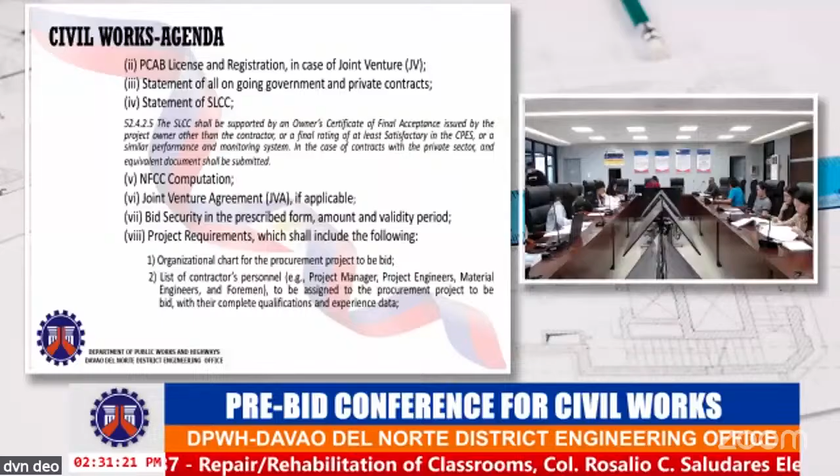Then list of contractor's personnel, list of contractor's major equipment units which are owned, leased, or under purchase agreements. Then omnibus sworn statement in accordance with section 54.3 of RA 12009. Then sworn affidavit of eligibility and beneficial ownership based on memorandum dated November 19, 2025.

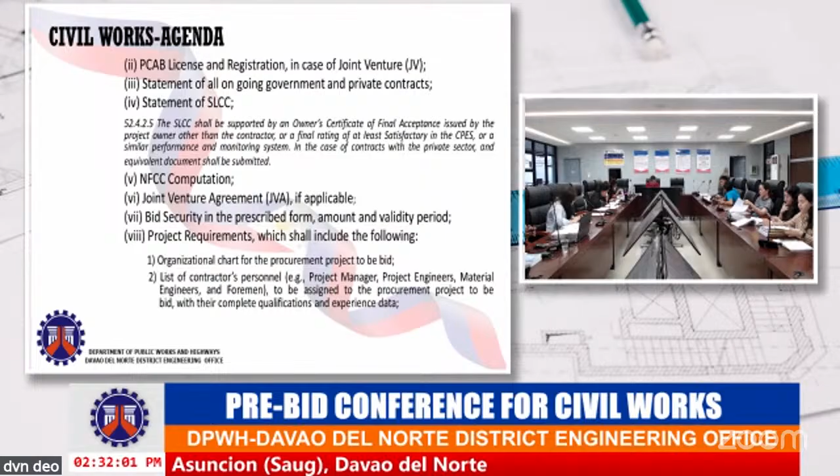And next is the financial proposal, the bid form, the bid prices in accordance with Instruction to Bidders clause 13.1.

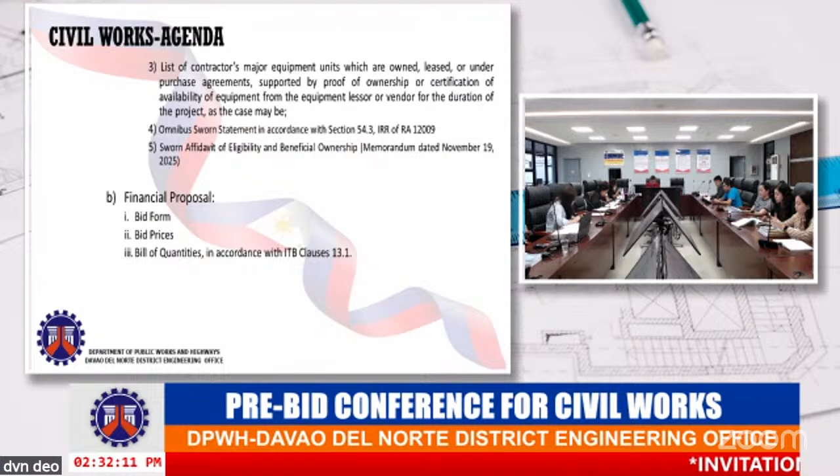Next is the criteria and procedure for eligibility check, preliminary examination of bids, detailed evaluation of bids, post-qualification, deliberation, recommending award, and award. And also, questions and comments from bidders, and replies of BAC and other representatives of the procuring entity.

Now, on other matters, be guided by the interim guidelines upon lifting of suspension on procurement activities for locally funded civil works projects, in reference to the department memorandum dated September 16, 2025, issued by Secretary Vivencio D. Dizon.

Applicable on this pre-bid conference, first, the live streaming. Also, the geotagging of project sites is applicable. For the implementing unit, the preparation of the straight line diagram is mandatory for inclusion as an attachment to the bidding documents.

Also, the NFCC and disclosure of relations beneficial to ownership, and some department orders for the guidance of the participating bidders.

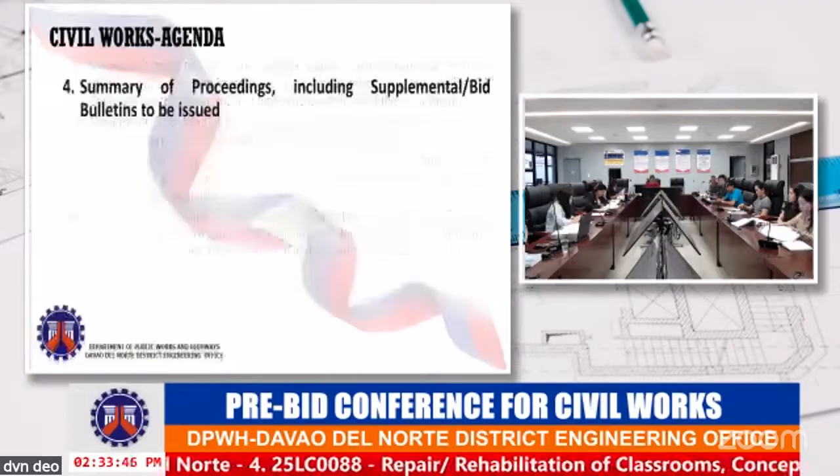Okay, so let's now proceed with the brief presentation of the basic contract data. Engineers from the Planning and Design Section is recognized. Go ahead.

Good afternoon, Mr. Chair, good afternoon everybody. The contract ID number is 25LC0084, the contract name is Construction of School Health Facilities, La Filipina Elementary School, City of Tagum, Davao del Norte. Brief description of the project is construction of school health facilities. The approved budget for the contract is 5,472,000, the source of fund is FY2025 GAA BEFF, and the contract duration is 120 calendar days.

Any changes, ma'am, from the previous pre-proc? None for the quantity, only the description, wherein we have to apply 3,000 PSI for the item number. Please go back to the first slide. On that data, ma'am, is there any change based on what we will adapt? None, Chair. Okay, so proceed.

So again, the contract name is Construction of School Health Facilities, La Filipina Elementary School, City of Tagum, Davao del Norte. The project ID is 25LC0084. The ABC amount is 5,472,000, and the contract duration is 120 calendar days, and the source of fund is FY2025 GAA BEFF.

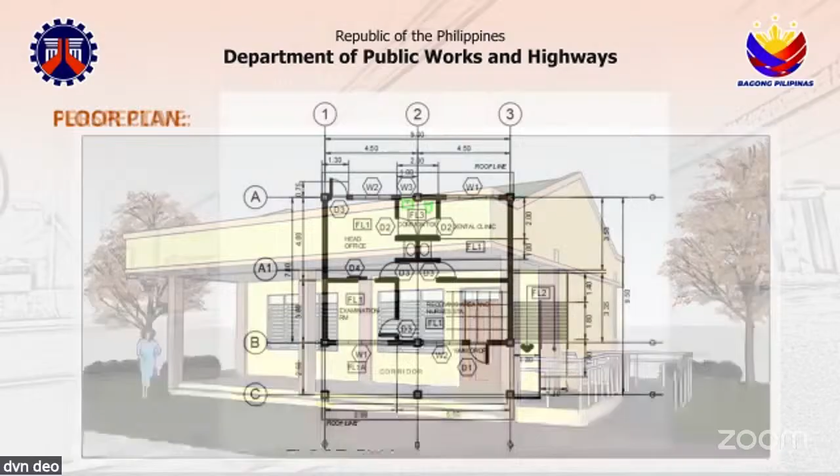This is the perspective of the project. The floor plan of the project, wherein there is a corridor, receiving area, examination room, head office, common toilet, and dental clinic.

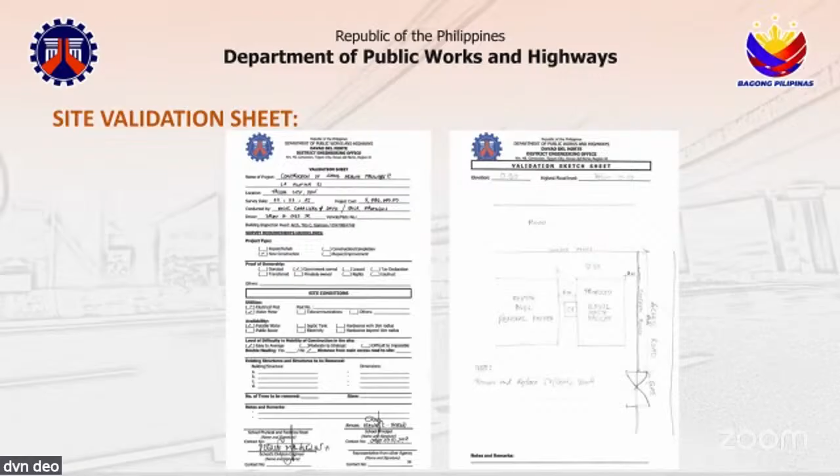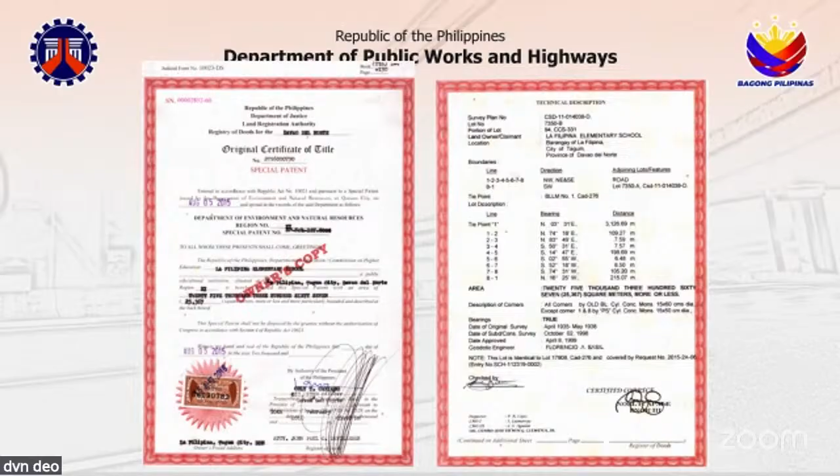The site validation sheet, and then the title - that's the original certificate of title. And that's all, thank you.

Good afternoon everyone. Good afternoon, Mr. Chair. For the bill of quantities, Ma'am Joanna, as posted po, pay item number 1051-8, railings. And sa presentation, pwede pa? Okay, sige. As presented po, 1051-1A, railings.

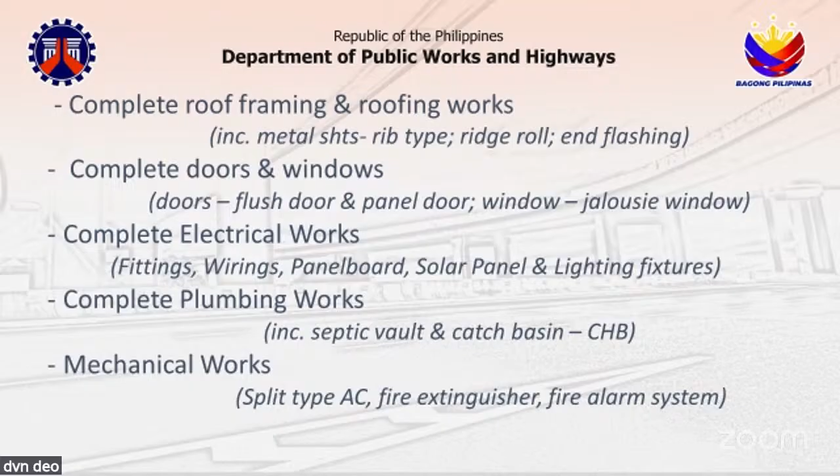The scope of works is removal of structure and obstruction for existing 11 by 11 old Packer building, structure excavation for footing, tie beam, ramp, steps, septic vault and catch basin, embankment from structure excavation, gravel fill for footing, tie beam, ramp, steps, septic vault and catch basin. Next slide please. Complete concrete works, complete masonry works, complete tiling works, complete cement plaster finish, complete ceiling works, complete tiling work, painting works. Complete roof framing and roofing works, complete doors and windows, complete electrical works, complete plumbing works, and mechanical works.

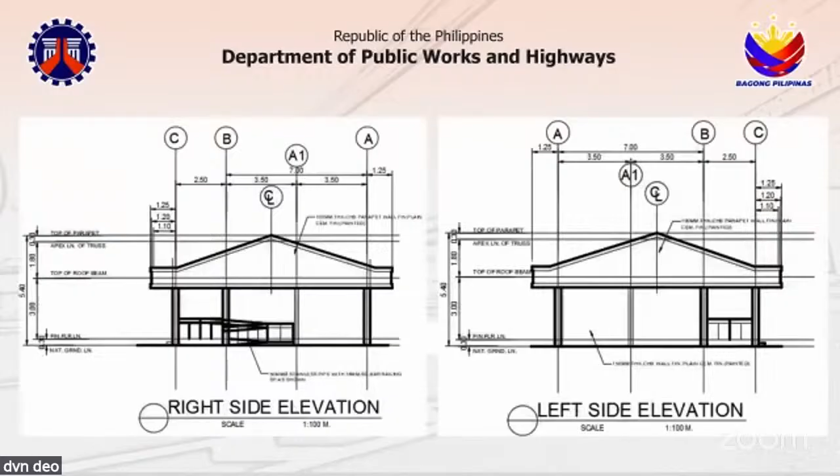Then we have the item number, description, quantity, and unit of the project. For Part A and Part B, other general requirements: permit and clearances, 1 lump sum; project billboard and signboard, 2 each; occupational safety and health, 1 lump sum; mobilization, demobilization, 1 lump sum. For Part C, earthwork: removal of structure and obstruction, 1 lump sum, this is for the removal of Packer building; structure excavation common soil, 75 cubic meter; embankment from roadway structure excavation, 60 cubic meter; gravel fill, 19 cubic meter.

For Part D, reinforced concrete: structural concrete, class B, 28 days, 3,000 PSI, 14.78 cubic meter; structural concrete, class A, 28 days, 4,000 PSI, 29.39 cubic meter; reinforcing steel deform grade 40, 2,779.06 kilogram; reinforcing steel deform grade 60, 4,857.35 kilogram; formworks and false works, 384.48 square meter.

For Part E, finishing, sanitary, and other civil works: soil poisoning, 4 liters; CHB non-load bearing including reinforcing steel, 100mm, 144.75 square meter; CHB non-load bearing including reinforcing steel, 150mm, 131.10 square meter; 6mm ordinary plywood in wood framing ceiling, 108 square meter; glazed tiles and trims, 10.66 square meters; unglazed tiles, 108 square meters; cement plaster finish, 765.30 square meters; reflective insulation, 85.50 square meters; railings, 1 lump sum; painting works for masonry and concrete, 819.9 square meters; for wood, 26.70 square meters.

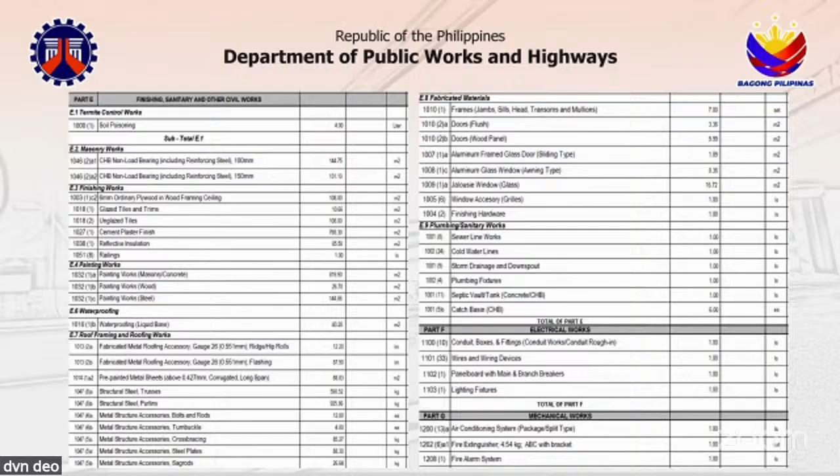And for Part G, the mechanical works, we have air conditioning system, fire extinguisher, fire alarm system, are also in 1 lump sum. The geotag photo of the project.

Then the sub-allotment advice. The site validation sheet. And the proof of ownership.

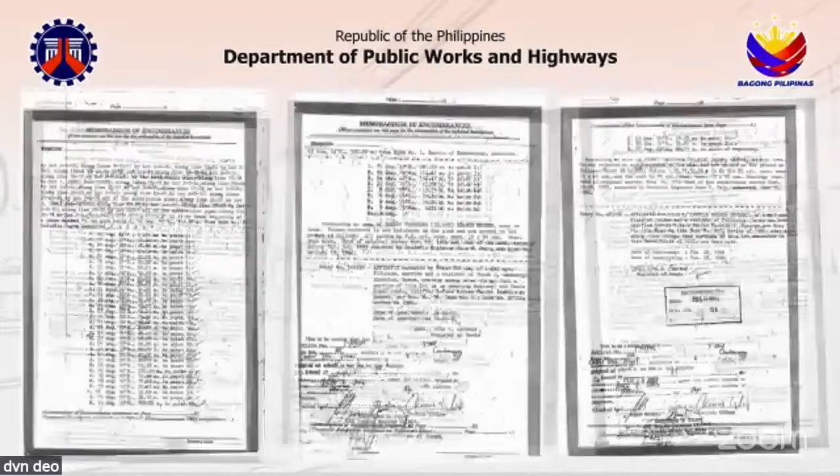Thank you. Implementing office, kindly state the range of PCAB license and the majority of works, or the major category of works. Who identifies the major category of works? Is it the implementing office?

Implementing office, Mr. Chair, but please coordinate with planning. Okay, kindly state. For the 25LC084 and 25LC085, the major category of works,

Hearing none, proceed to the next.

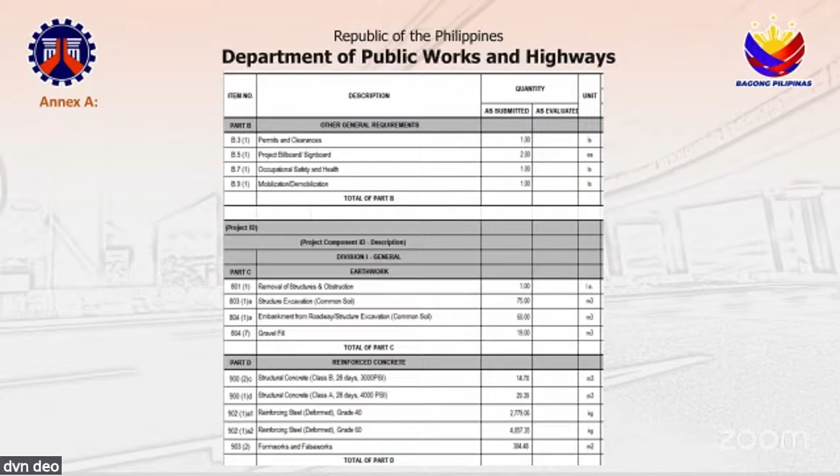Next, contract ID. Proceed. The next contract ID number is 25LC0087. This is the repair rehabilitation of classroom, Rosalio C. Saludares Elementary School, City of Tagum, Davao del Norte.

This is the repair rehabilitation of classrooms. The approved budget for the contract is 10,450,000. The source of fund is FY 2025 GAA BEFF, and the contract duration is 180 calendar days.

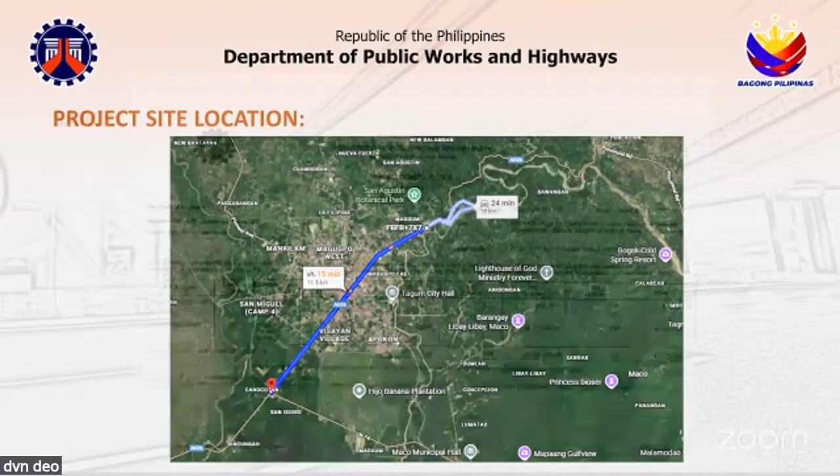And this is the project site location. From our office to the project site, the distance is 11.5 kilometer, or there is 18 kilometer also, the longest. Then the sub-allotment advice.

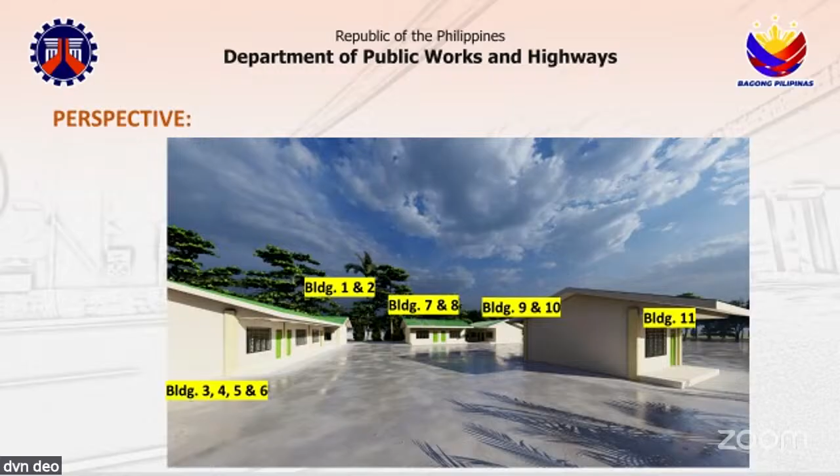Okay. The perspective for building 1 and 2, building 3, 4, 5, 6, building 7 and 8, building 9 and 10, and the building 11. The geotag of the photo, some are not yet reflected with the 8 digits, some with.

Next slide. This one already reflects the 8 digit for building 1 and 2. Next slide. For building 3, 4, 5, 6 also. For building 7 and 8,

not yet reflected, the 8 digits. What was provided, Mr. Chair, was the survey covering only building 1 to 6. Yes, Mr. Chair.

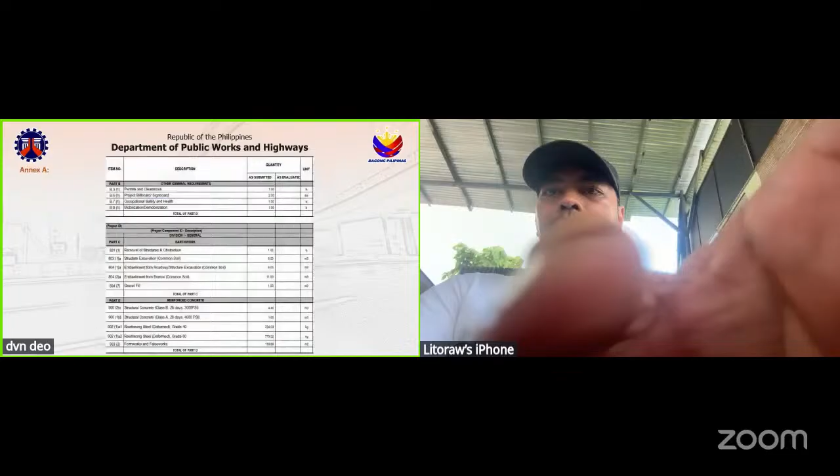Then for Annex A, related to the item number, description, quantity, and the unit. For Part B, the other general requirements, we have permits and clearances, 1 lump sum, project billboard, signboard, 2 each, occupational safety and health, 1 lump sum, mobilization, demobilization, 1 lump sum. For Part C, earthwork, we have removal of structures and obstructions, 1 lump sum. Structure excavation, common soil, 6 cubic. Embankment from roadway structure excavation, common soil, 6 cubic. Embankment from borrow, common soil, 11 cubic. And gravel fill, 1 cubic.

For Part D, the reinforced concrete, we have structural concrete class B, 28 days, 3,000 PSI, 4.45 cubic. Structural concrete class A, 28 days, 4,000 PSI, 1.6 cubic. Reinforcing steel deform, grade 40, 734.03 kilogram. For grade 60, 773.02 kilogram. For falseworks and formworks, we have 116.68 square meter.

For Part E, the finishing sanitary and other civil works, we have CHB non-load bearing 100 mm, 88.80, and next time po we have to indicate the PSI, which is the 600. And then for the 150 mm, we have 297 square meter, and also this one to be indicated also for the PSI. For cement plaster finish, 794.49 square meter. Ceiling, 1,413.56 square meter. Window accessories, 1 lump sum. Jalousie window, 126.72 square meter.

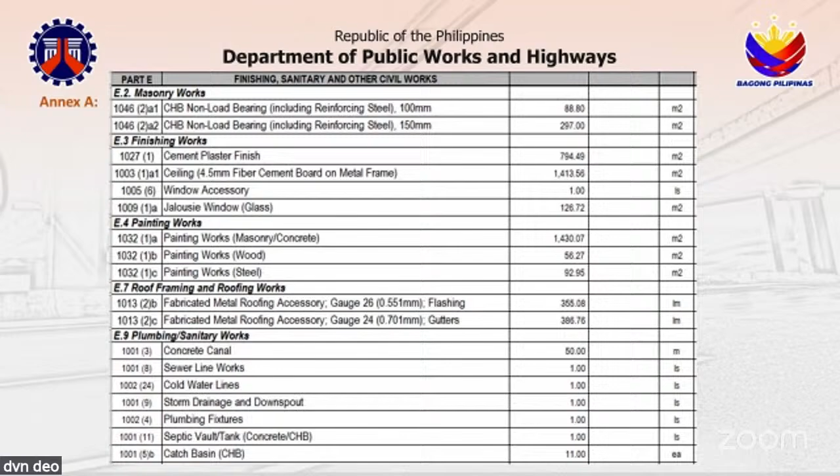So it was being emphasized during the proc. So ito na, concrete canal, 50 meter. Then sewer line works, 1 lump sum. Cold water lines, 1 lump sum. Storm drainage and downspout, 1 lump sum. Plumbing fixture, 1 lump sum. Septic vault, 1 lump sum. And catch basin, 11 each. That's all, and thank you.

Okay, thank you. Implementing office, kindly state the range of PCAB license and the major category of works. For the contract ID 25LC0087, the range of PCAB license, small b, and the major category of works, BIR, buildings repair. Okay, thank you.

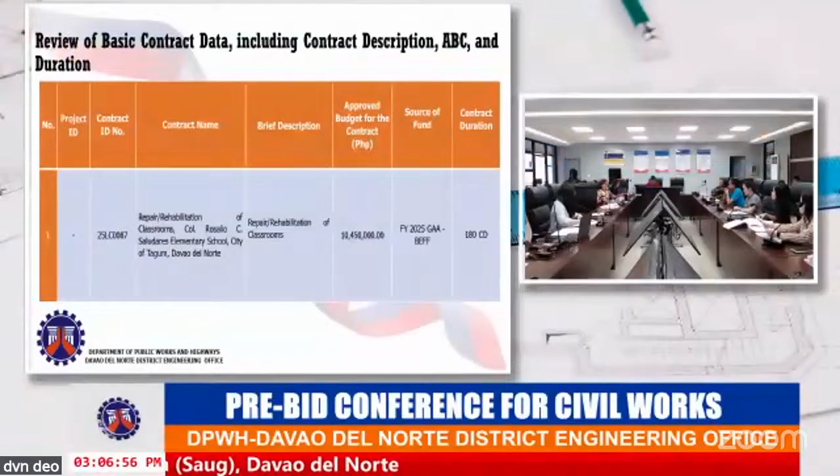Any other query? Hearing none. Next, contract ID. Mr. Chair, yes go ahead. Before the next contract ID, we have to recognize Engineer Walito Linjo and Engineer Nazareno. They are joining, Mr. Chair, online. Okay sige, screenshot, Mr. Chair. Okay sige, thank you. Next, contract ID.

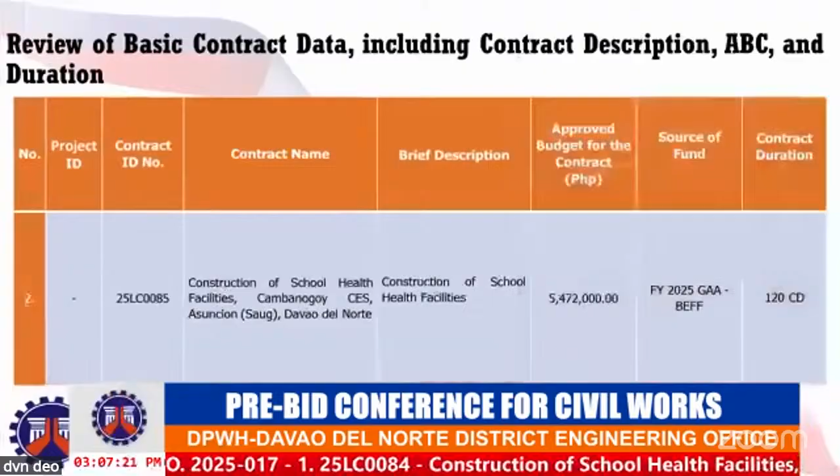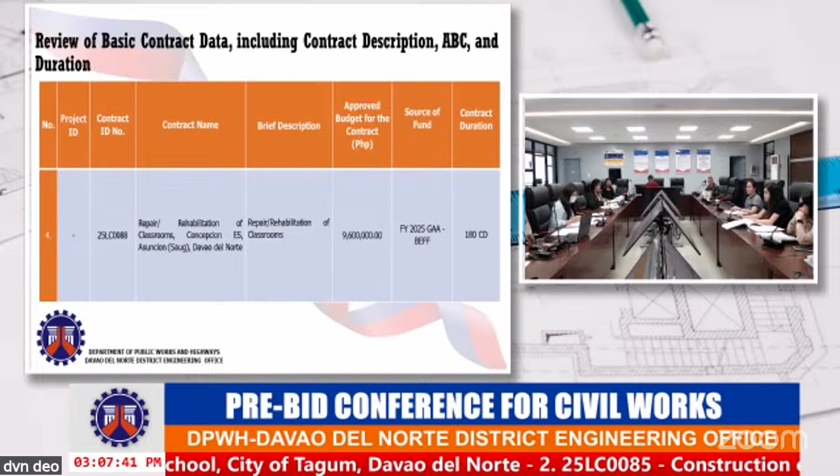Good afternoon, Mr. Chair, and to everyone present, as well as those attending online. So I'll be presenting contract ID number 25LC0088, contract name repair, rehabilitation of classrooms, Concepcion ES, Asuncion Saug, Davao del Norte. A brief description: repair, rehabilitation of classrooms, an ABC of 9,600,000 under FY 2025 GAA BEFF, and a contract duration of 180 calendar days.

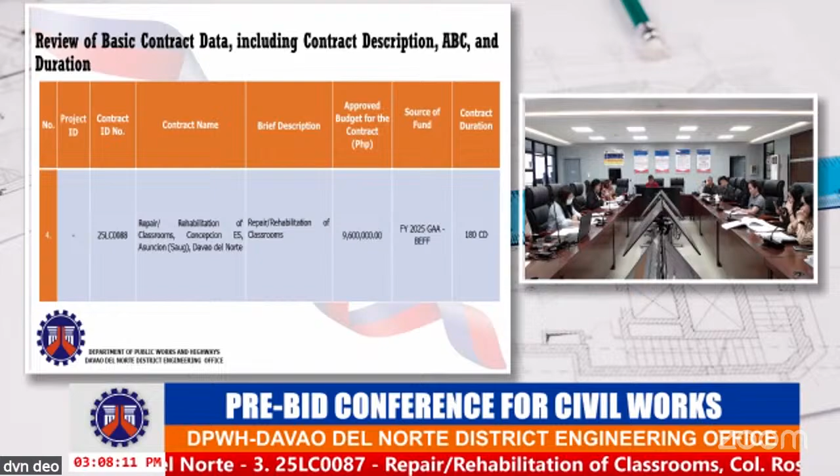So again, for the contract ID 25LC0088, repair, rehabilitation of classrooms, Concepcion ES, Asuncion Saug, Davao del Norte, ABC of 9,600,000, contract duration of 180 calendar days, and under FY 2025 GAA BEFF.

For the scope of works, we have repair of 8 classrooms. First is the 5 classrooms with feeding center, elevated at 1 meter high. So we have removal of structures and obstruction, retrofitting of existing columns, CHB at 1 meter high only, and after drywall na, complete roofing works with reflective insulation, structural steel such as trusses, purlins, sagrods, etc., complete ceiling works, marine plywood on metal frame, complete painting works for masonry, wood and steel, tiling works for the CR. We have also doors and windows, complete electrical works and plumbing works, and installation of blackboards and ceiling fans.

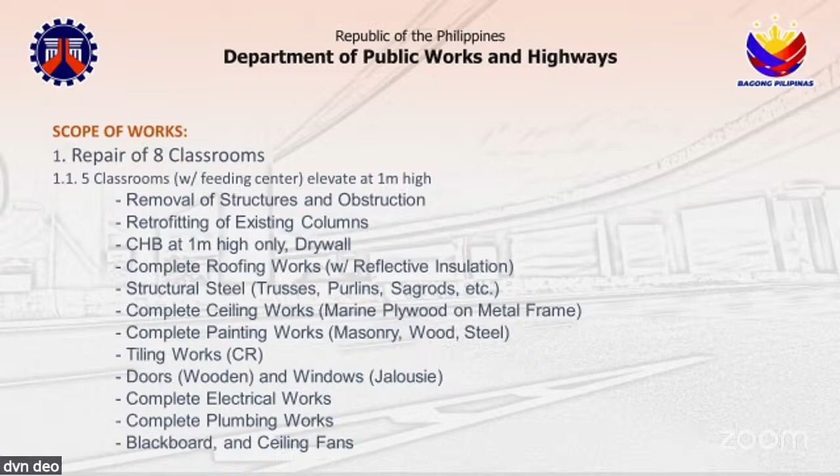For the 3 classrooms, we have replacement of ceiling works, marine plywood on metal frame, complete walls, so drywall ang ato ibutang, repainting of masonry and steel, tiling works sa CR, doors and windows, and replacement of ceiling works, and lastly, installation of blackboard and ceiling fans.

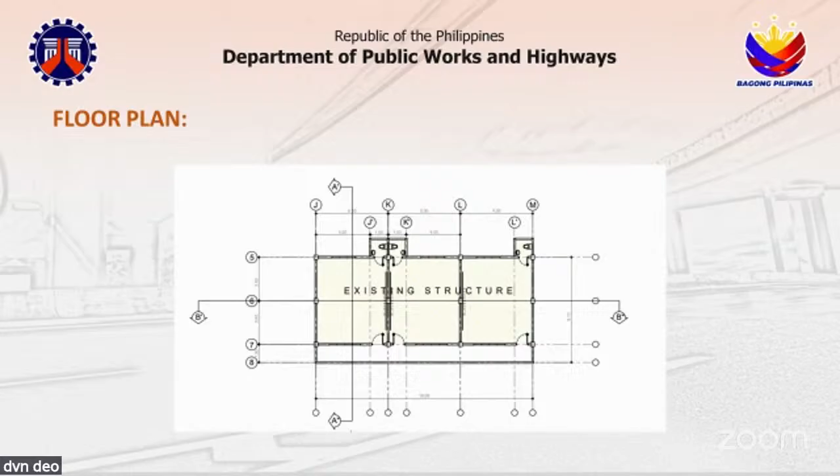So these are the pay items included in the project. So we have Part B, other general requirements. This includes B.31, permits and clearances, 1 lump sum; B.51, project billboard/signboard, 2 each; B.71, occupational safety and health, 1 lump sum; B.91, mobilization/demobilization, 1 lump sum.

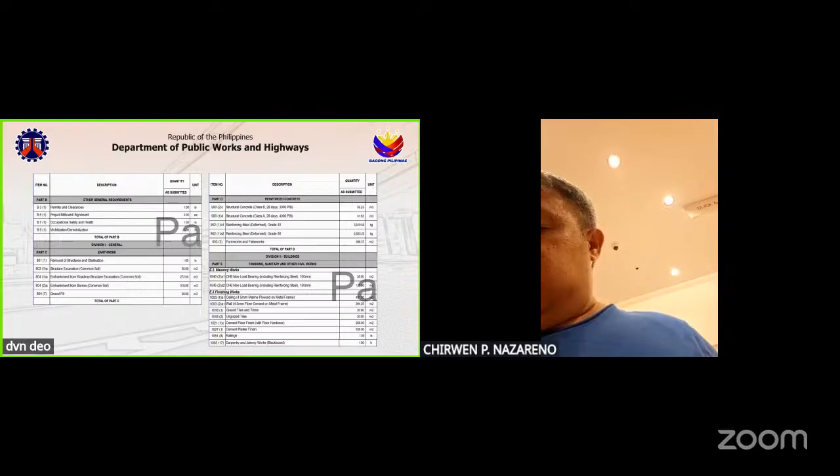As for Part C, we have earthworks, including 801-1, removal of structures and obstruction, 1 lump sum; 803-1A, structure excavation, common soil, 58 cubic meter; 804-1A, embankment from roadway or structure excavation for common soil, 272 cubic meter; 804-2A, embankment from borrow, common soil, 318 cubic meter; and lastly, 804-7, gravel fill, 36 cubic meter.

For Part D, reinforced concrete: 900-2C, structural concrete Class B, 28 days, 3000 PSI, 35.23 cubic meter; 900-1D, structural concrete Class A, 28 days, 4000 PSI, 31.63 cubic meter; 902-1A1, reinforced steel grade 40, 3810.58 kilogram; 902-1A2, reinforced steel grade 60, 2823.25 kilogram; and 903-2, formworks and falseworks, 399.37 square meter. For Part E, we have finishing, sanitary, and other civil works.

E.2 masonry works: items for CHB 100mm and CHB 150mm with corresponding 35 and 120 square meters. For E.3 finishing works, this includes items for ceiling, 4.5mm marine plywood on metal frame, with 481 square meter. For walls, we have 4.5mm fiber cement on metal frame, 364.25 square meters. For glazed and unglazed tiles, we have 30 and 20 square meters respectively.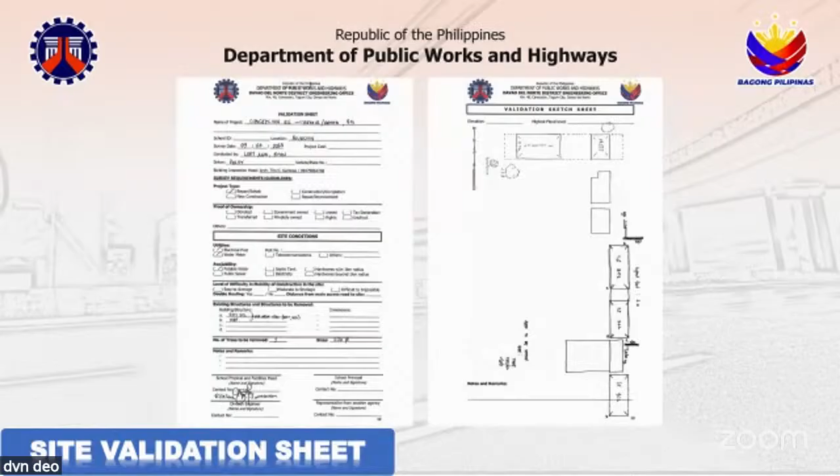Any concern during the pre-proc?

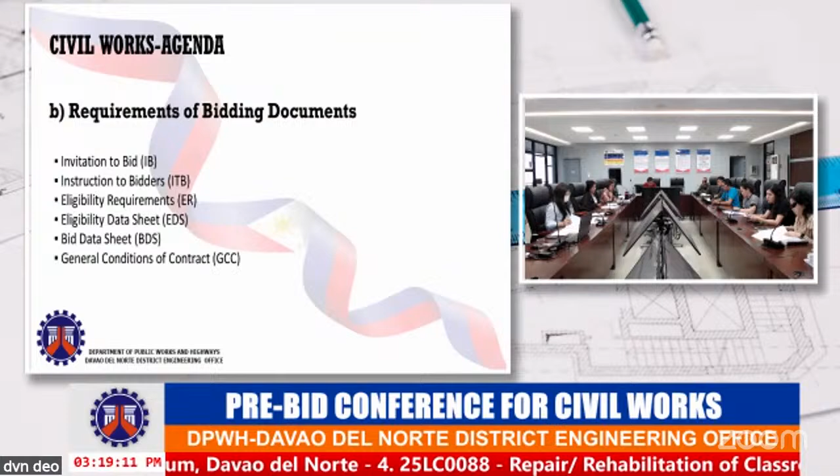Next let's proceed to the requirements of bidding documents. This includes invitation to bid, instruction to bidders, bid data sheet, general conditions of contract, special conditions of contract, specifications, drawings, bill of quantities, and Philippine bidding documents related forms. The bidding documents are posted on the DPWH website and PhilGEPS.

Amendments in the provision of the bidding documents shall be issued through a supplemental bid bulletin and will be posted in the bid bulletin and notices.

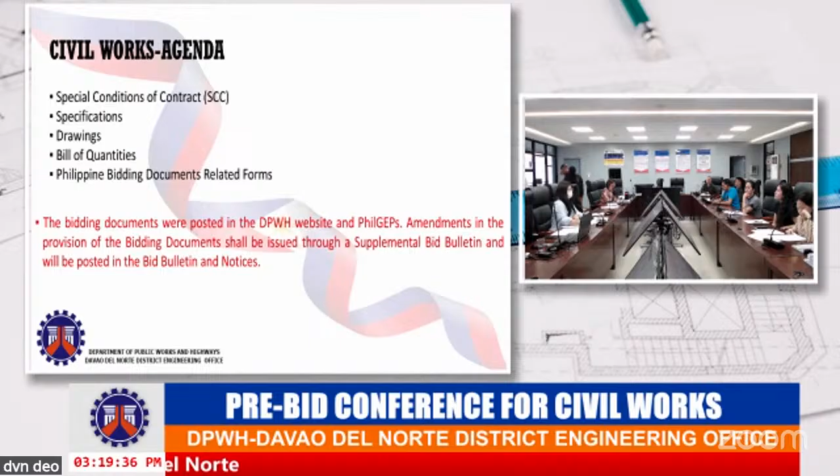Documents to be submitted by the bidder: technical and financial proposals. Bids must be duly received by the procuring entity's BAC at Kilometer 48, Barangay Canocotan, Tagum City, Davao del Norte for manual submission, or at the electronic bids Davao del Norte address for electronic submission.

At dpwh.gov.ph for electronic submission, bidders should only select one mode of submission, either manual or electronic. For electronic submission, prior to the deadline, the prospective bidder shall send an email attaching a copy of the official receipt of purchase of bidding documents in PDF format. Only electronic bids of bidders who have successfully submitted an electronic official receipt shall be accepted.

Prospective bidders shall prepare their bids in two file folders in appropriate documents and file format, each for the technical and financial components. Only during the actual opening of bids shall the bidder disclose the passwords for his electronic bid. This can be done by the bidder's authorized representative, verbally in person, through phone call, online platforms, or through writing.

For joint ventures, the format of PCAB ID to be used by the bidder in naming their files shall be the PCAB ID of the lead member. The step-by-step detailed procedure of electronic submission is stipulated in Bidding Documents Clause 22 and in Department Order 87, Series of 2020.

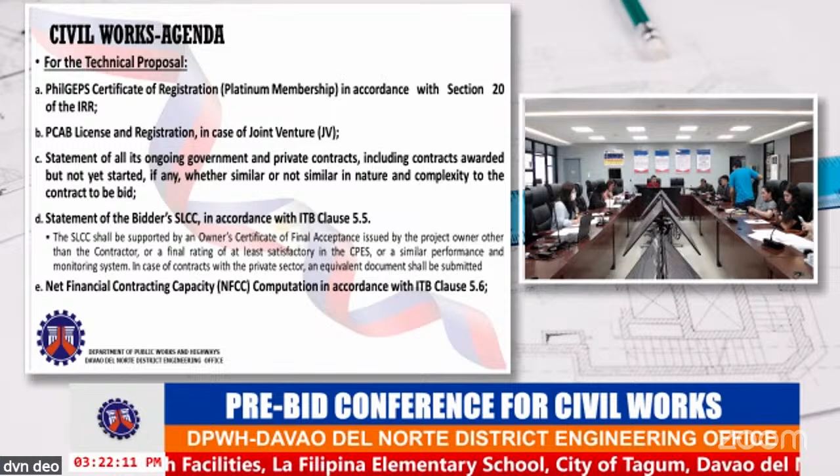For the technical proposal: PhilGEPS Certificate of Registration, Platinum Membership in accordance with Section 20 of the IRR, PCAB license and registration in case of joint venture, statement of all ongoing government and private contracts including contracts awarded but not yet started, if any, whether similar or not similar in nature and complexity to the contract to be bid.

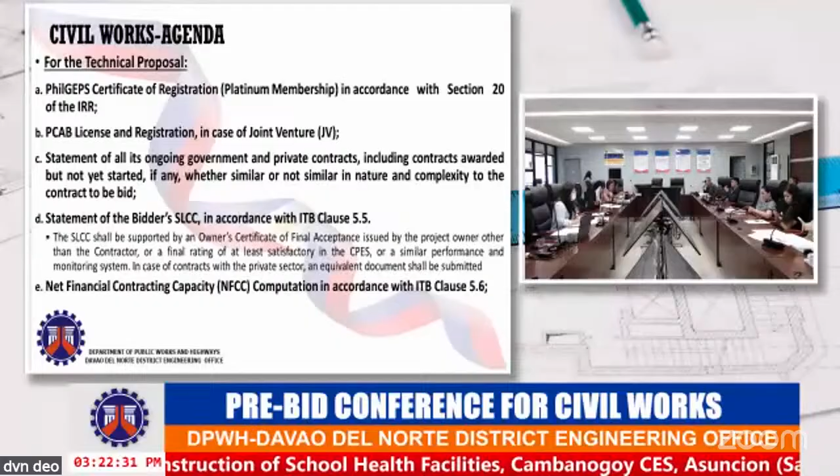Statement of the bidder's Single Largest Completed Contract or SLCC in accordance with ITB Clause 5.5. The SLCC shall be supported by the owner's Certificate of Final Acceptance issued by the project owner other than the contractor, or a final rating of at least satisfactory in the CPES or a similar performance and monitoring system. In case of contracts with the private sector, an equivalent document shall be submitted.

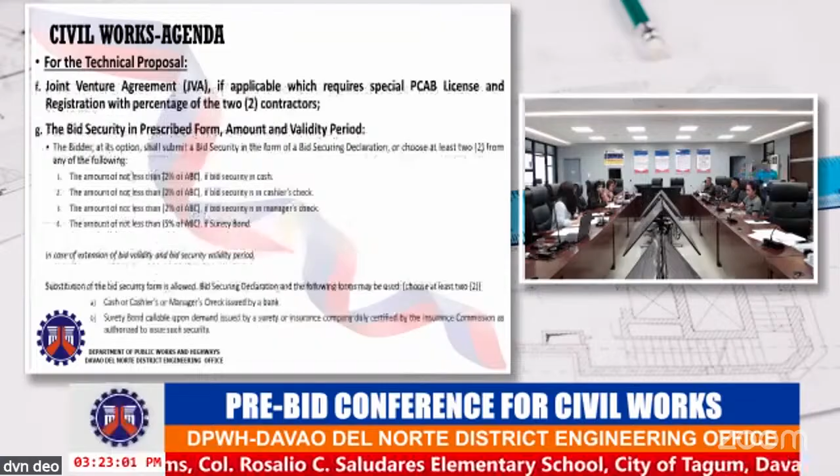Net Financial Contracting Capacity or NFCC computation in accordance with ITB Clause 5.6. Joint venture agreement, if applicable, which requires special PCAB license and registration with percentage of the two contractors.

The bid security in prescribed form, amount, and validity period. The bidder, at its option, shall submit a bid security in the form of a bid securing declaration or choose at least two from any of the following: an amount of not less than 2% of ABC if bid security is in cash.

The amount of not less than 2% of ABC if bid security is in cashier's check, the amount of not less than 2% of ABC if bid security is in manager's check, and the amount of not less than 5% of ABC if surety bond.

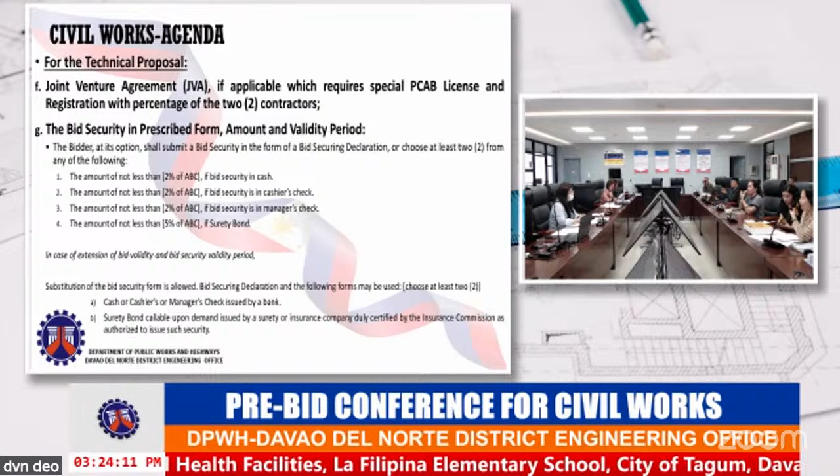In case of extension of bid validity and bid security validity period, substitution of the bid security form is allowed. Bid securing declaration and the following forms may be used: cash, cashier's or manager's check issued by a bank, or surety bond callable upon demand issued by a surety or insurance company duly certified by the Insurance Commission as authorized to issue such security.

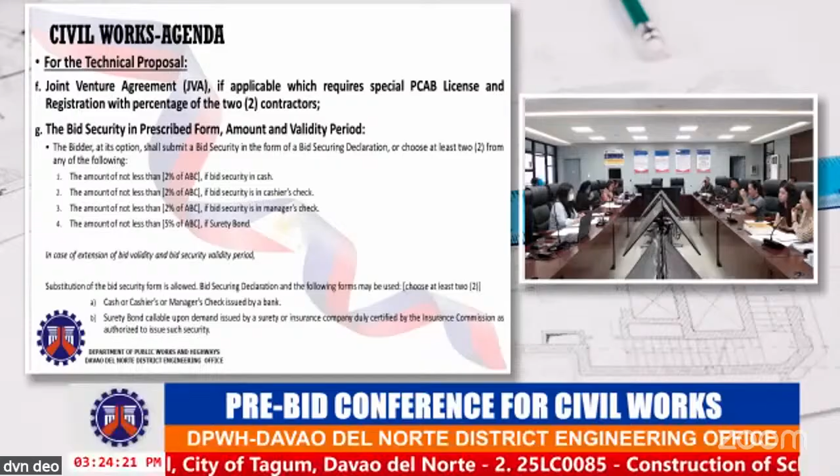Bid shall remain valid for the period specified in the BDS, which shall not exceed 120 calendar days from the date of the opening of bids. Should it become necessary to extend the validity of the bids and bid securities beyond 120 calendar days, the procuring entity concerned shall request in writing all those who submitted bids for such extension before the expiration date. Any discrepancy in the amount, even a centavo, means non-compliant.

Project requirements shall include the organizational chart of the personnel to be deployed for the procurement project to be bid, and a list of the contractor's personnel, such as project manager, project engineers, materials engineers, and foreman, to be assigned to the project, with their complete qualifications and experience data.

These personnel must meet the required minimum years of experience set in the BDS. As per Department Order Number 9, Series of 2012, if a proposed key technical personnel is an employee of the bidder and working on another project at the time of bidding, the bidder shall submit a certification that the personnel will be pulled out from the ongoing project once awarded the contract, and will be replaced with another person of equal or better qualifications as certified by the head of the implementing office.

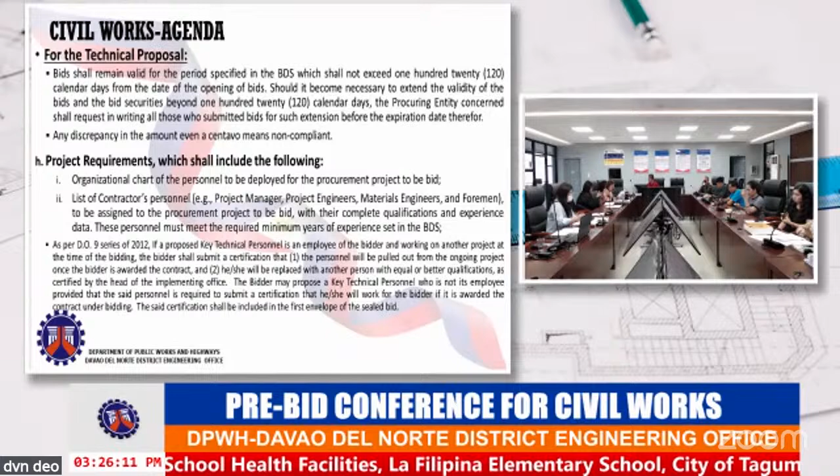The bidder may propose a key technical personnel who is not its employee, provided that the said personnel submit a certification that he or she will work for the bidder if awarded the contract under bidding. This certification shall be included in the first envelope of the sealed bid.

As per Department Order Number 252, Series of 2025, issued by the Department of Labor and Employment, revised implementing rules and regulations of RA 11058, entitled An Act Strengthening Compliance with Occupational Safety and Health Standards and Providing Penalties for Violations thereof, under Section 10, Safety in the Use of Equipment: operators shall undergo appropriate training and certification from TESDA, the Professional Regulation Commission, or other relevant government agencies before using the equipment. DOLE may recognize training provided by equipment manufacturers, suppliers, or international organizations if not available locally.

Accredited Safety Officer requirements for approval of the Construction Safety and Health Program are required upon issuance of the Notice of Award, in compliance with DOLE Department Order Number 252, Series of 2025, under Section 22, Occupational Safety and Health Standards for the Construction Industry. This includes a first aider with a certificate of training issued by the Philippine Red Cross or an organization authorized by the Secretary of Labor and Employment.

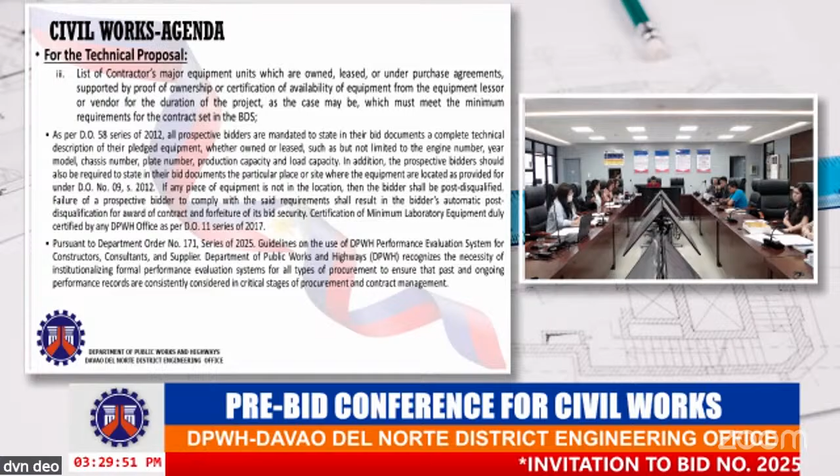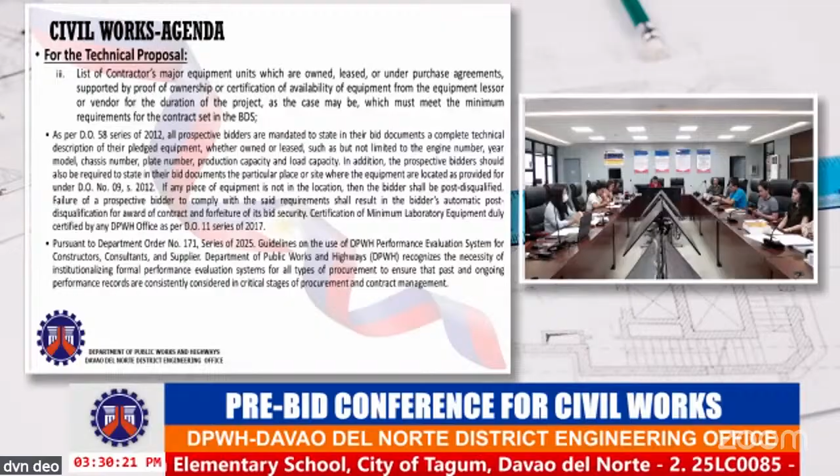Pursuant to Department Order Number 171, Series of 2025, Guidelines on the Use of the DPWH Performance Evaluation System for Contractors, Consultants, and Suppliers, the Department of Public Works and Highways recognizes the necessity of institutionalizing formal performance evaluation systems for all types of procurement, to ensure that past and ongoing performance records are consistently considered in critical stages of procurement and contract management.

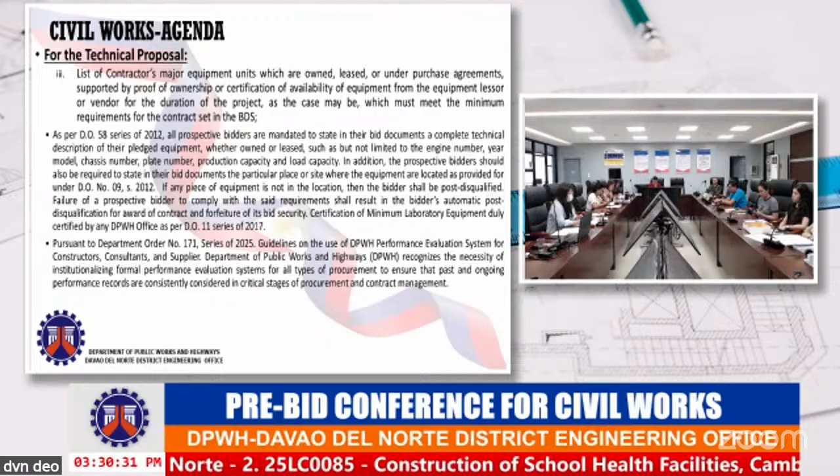At the eligibility stage, pursuant to Section 54.4.4.2.5 of the IRR of Infrastructure Projects, bidders shall submit proof of satisfactory past performance, such as a CPES rating of at least satisfactory, or an owner's certificate of final acceptance or equivalent for private sector contracts.

Bidders must ensure adherence to Department Order 110, Series of 2024, for the implementation of the ISO 9001-2015 certification requirement for Large A, Medium B, and Medium A contractors in the procurement of infrastructure projects of the department.

Bidders must attach to the technical envelope their ISO 9001-2015 certification. Failure to attach will lead to the disqualification of their bid. This requirement applies to the following PCAB size range and their effectivity, to wit.

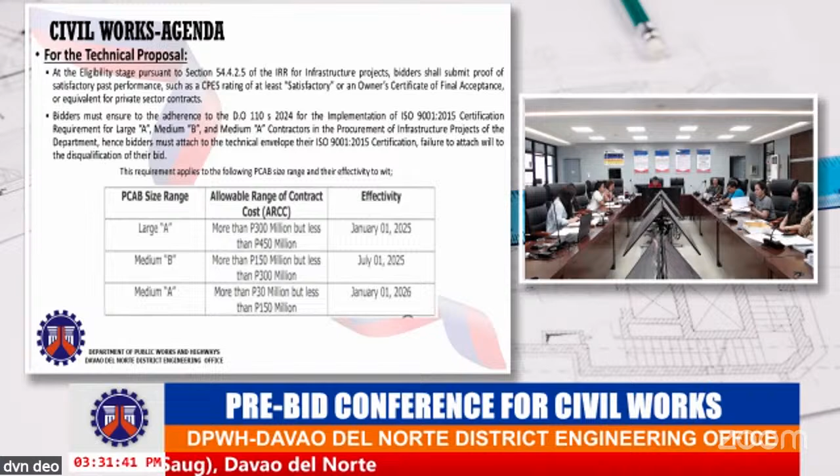Large A, more than 300 million but less than 450 million, will be effective January 1, 2025. Medium B, more than 150 million but less than 300 million, will take effect July 1, 2025. And Medium A, more than 30 million but less than 150 million, will take effect January 1, 2026.

Pursuant to DO 169 series of 2025, only accredited project engineers may be assigned to DPWH projects, subject to the following limits of assignment. For Project Engineer 2, 10 contracts located within the same region for simultaneous assignment, but with an aggregate cost of 1.8 billion.

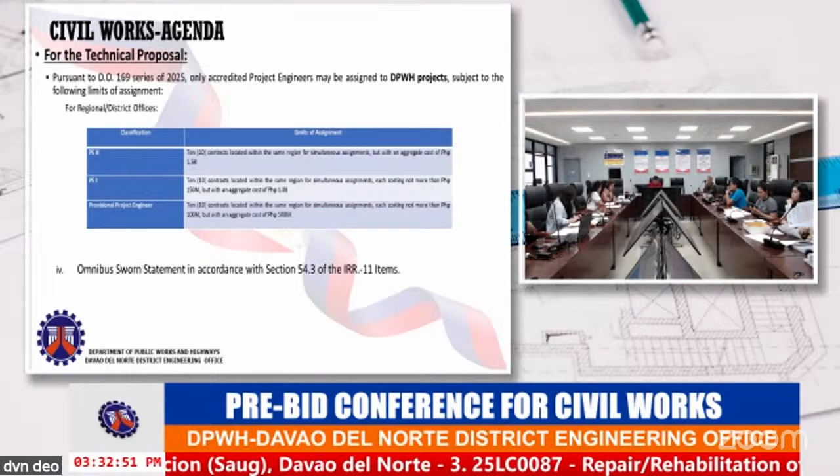Project Engineer 1, 10 contracts located within the same region for simultaneous assignment, each costing not more than 150 million, but with an aggregate cost of 1.8 billion. Provisional Project Engineer, 10 contracts located within the same region for simultaneous assignment, each costing not more than 100 million, but with an aggregate cost of 500 million.

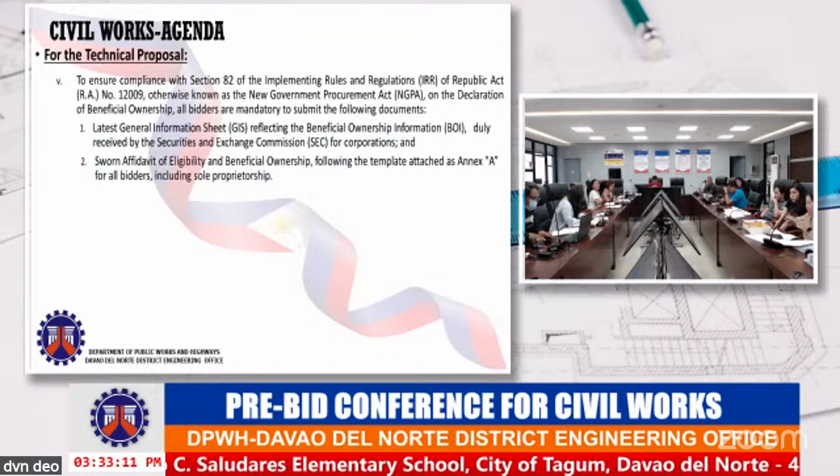The Omnibus Sworn Statement, in accordance with Section 54-3 of the IRR, has 11 items to ensure compliance with Section 82 of the IRR of RA 12009, otherwise known as the New Government Procurement Act or NGPA, on the declaration of beneficial ownership. All bidders are mandatory to submit the following documents: latest General Information Sheet reflecting the beneficial ownership information duly received by the Securities and Exchange Commission for corporations, and sworn affidavit of eligibility and beneficial ownership following the template attached as Annex A, for all bidders including sole proprietorship.

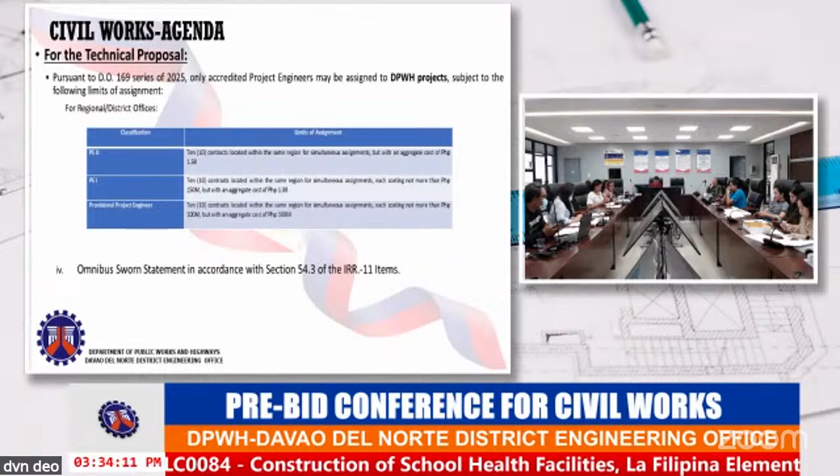Okay, for correction: for Project Engineer 2, that would be up to an aggregate cost of 1.5 billion. And for Project Engineer 1, the aggregate cost is up to 1 billion.

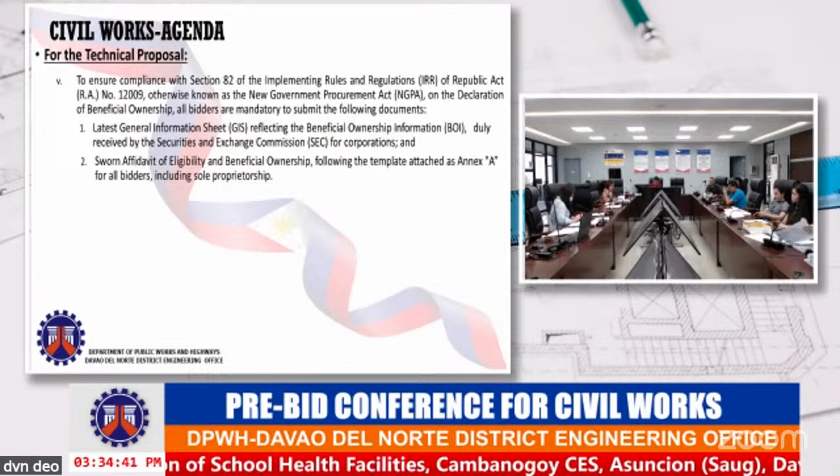For correction, accordingly all are hereby directed to ensure that each bidder's GIS reflecting the BOI duly submitted to the SEC is maintained, valid and updated in their PhilGEPS registration as part of their eligibility, and further to require mandatory submission of the same and the sworn affidavit in their bid.

See attached Annex B. For the financial proposal: financial bid form, bid prices, bill of quantities, in accordance with ITB Clause 13.1. Failure to attach any requirement, or any missing, incomplete, or patently insufficient documents in the above-mentioned checklist is a ground for outright rejection of the bid and will be rated as non-compliant. All documents to be submitted must be current and updated, otherwise it will be rated as failed.

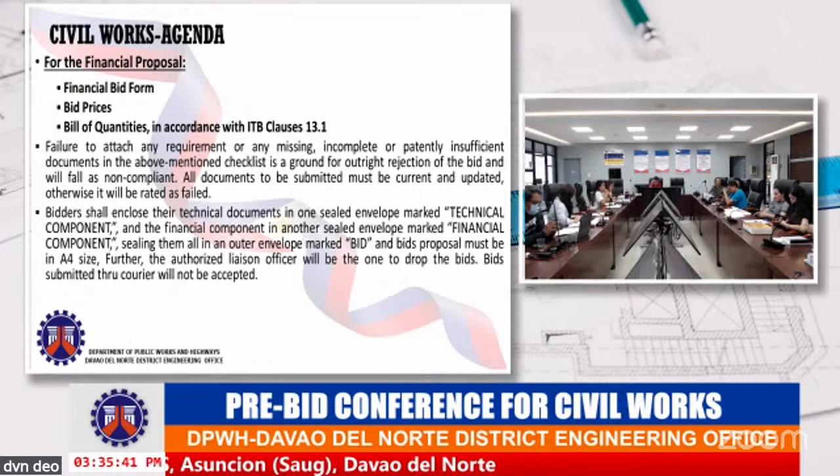Bidders shall enclose their technical documents in one sealed envelope marked technical component, and the financial component in another sealed envelope marked financial component, sealing them all in an outer envelope marked bid. The bid proposal must be in A4 size. Further, the authorized liaison officer will be the one to drop the bids. Bids submitted through courier will not be accepted.

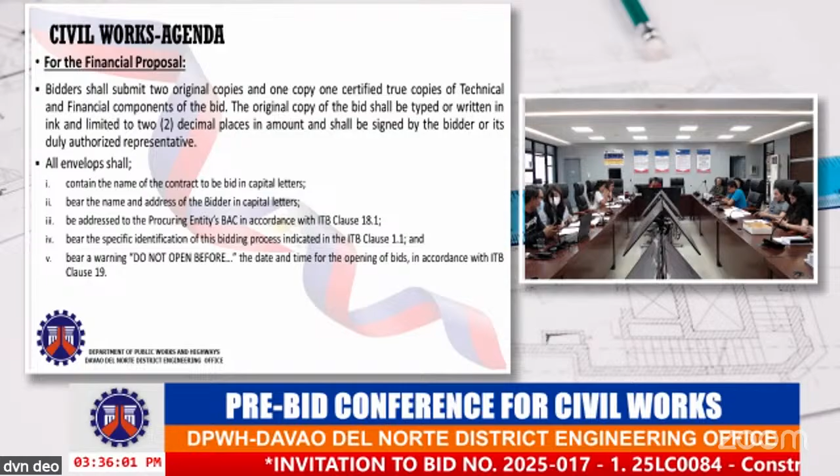Bidders shall submit 2 original copies and 1 certified true copy of the technical and financial components of the bid. The original copy of the bid shall be typed or written in ink, limited to 2 decimal places in amount, and shall be signed by the bidder or its duly authorized representative.

All envelopes shall contain the name of the contract to be bid in capital letters, bear the name and address of the bidder in capital letters, be addressed to the procuring entity's bac in accordance with ITB Clause 18-1, bear the specific identification of this bidding process as indicated in ITB Clause 1-1, and bear a warning: do not open before the date and time for the opening of bids, in accordance with ITB Clause 19.

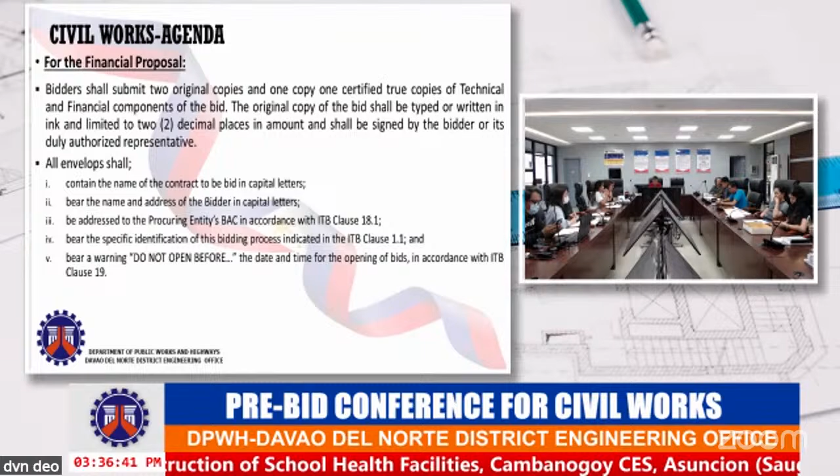Bidders were also advised to be responsible for their bid submitted in accordance with the checklist, and their technical and financial proposal should have proper tabbing in words, based on the order in the checklist, including proper sequencing of documents in chronological order. Further, bidders were advised not to recycle legal documents or documents attached in previous submissions of bids which have the signatures and countersignatures of the BAC members.

Late bids submitted will not be accepted. All forms as mentioned in ITB Clause 17-1 must be completed without any alterations to their format. No substitute form shall be accepted.

Each and every page of the bid form, including the bill of quantities under Section 8 hereof, shall be signed by the duly authorized representative of the bidder. Failure to do so shall be ground for the rejection of the bid. Any insertions, erasures, or overwriting shall be valid only if they are signed or initialed by the duly authorized representative of the bidder.

Bidders with the lowest bid during the opening of bids are not guaranteed to be awarded the contract. All bid documents are still subject to detailed bid evaluation and post-qualification prior to being declared the lowest calculated responsive bid, and subsequently to be awarded the contract.

Criteria and procedure for eligibility check: preliminary examination of bids, detailed evaluation of bids, post-qualification, deliberation recommending award, and award.

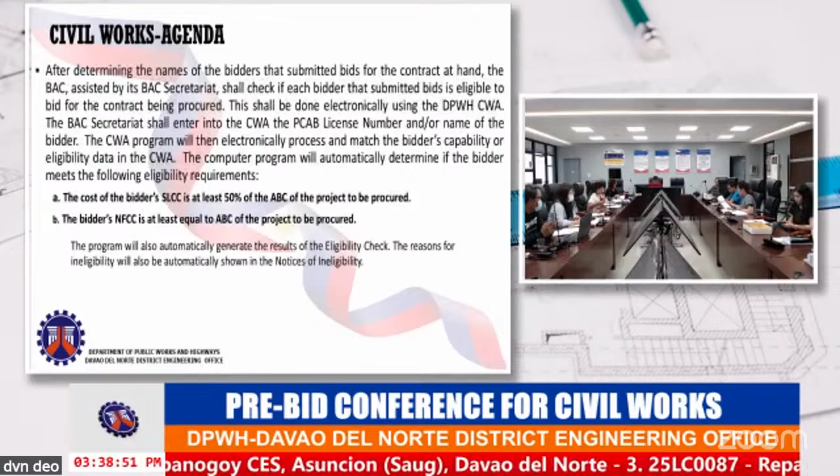After determining the names of the bidders that submitted bids for the contract at hand, the BAC, assisted by its BAC Secretariat, shall check if each bidder that submitted bids is eligible to bid for the contract being procured. This shall be done electronically using the DPWH CWA. The BAC Secretariat shall enter into the CWA the PCAB license number and/or name of the bidder. The CWA program will then electronically process and match the bidder's capability or eligibility data. The computer program will automatically determine if the bidder meets the following eligibility requirements.

The cost of the bidder's SLCC is at least 50% of the ABC of the project to be procured. The bidder's NFCC is at least equal to the ABC of the project to be procured. The program will also automatically generate the results of the eligibility check, and the reasons for ineligibility will also be automatically shown in the notices of ineligibility.

Bidding will be conducted through competitive bidding procedures using a non-discretionary pass or fail criterion as specified in the IRR, otherwise known as the New Government Procurement Act, NGPA. This office reserves the right to reject any and/or all bids, declare a failure of bidding, or not award the contract at any time prior to contract award in accordance with Section 70 of RA number 12009, without thereby incurring any liability to the affected bidder or bidders.

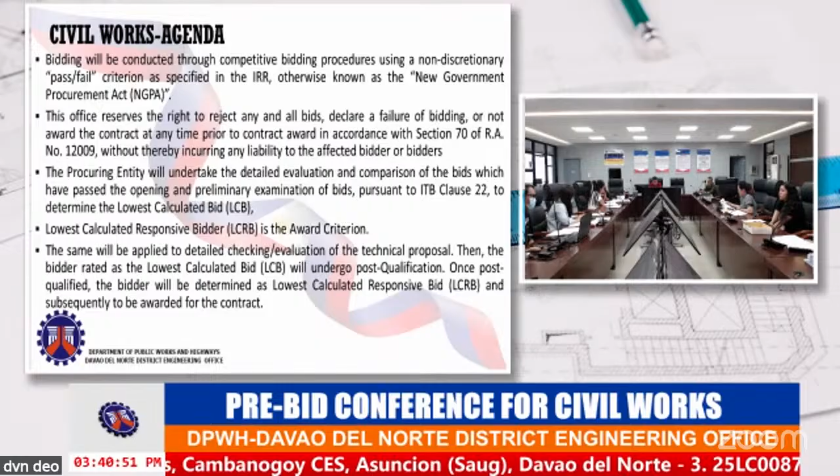Then, the bidder rated as the lowest calculated bid will undergo post-qualification. Once post-qualified, the bidder will be determined as lowest calculated responsive bid and subsequently awarded the contract.

All bidders found to have conflicting interest shall be disqualified to participate in the procurement at hand, without prejudice to the imposition of appropriate administrative, civil, and criminal sanctions.

All prospective bidders shall be required to submit a sworn disclosure of relations and beneficial ownership, clearly identifying the natural persons who ultimately own, control, or benefit from the bidding entity, whether directly or indirectly, through shareholding, voting rights, contractual agreements, or other means of control. Failure to comply shall be a ground for the automatic disqualification of the bid, in consonance with Section 59 of the IRR.

For the post-qualification, the bidders were advised to read Department Order Number 127, Series of 2018, and other issuances relative to this matter, since the BAC will be very keen and strict on the conduct of the post-qualification process.

As per the said DO, the contractor will not be awarded a certain project if it has a negative slippage of at least 15% in a single contract, or at least 10% in 2 or more contracts.

Failure of the contractor to commence repair works on ongoing contracts within 7 days and to complete them within 30 days after receipt of the procuring entity's notice of defects and deficiencies, or failure of the contractor to commence repair works on contracts with pending certificate of acceptance within 30 days and to complete the works within 90 days after receipt of the procuring entity's notice of defects and deficiencies, or substandard quality of work as per contract plans and specifications, or unsatisfactory performance of the contractor's obligations as per contract terms and conditions at the time of inspection, or liquidated damages currently imposed on the contractor.

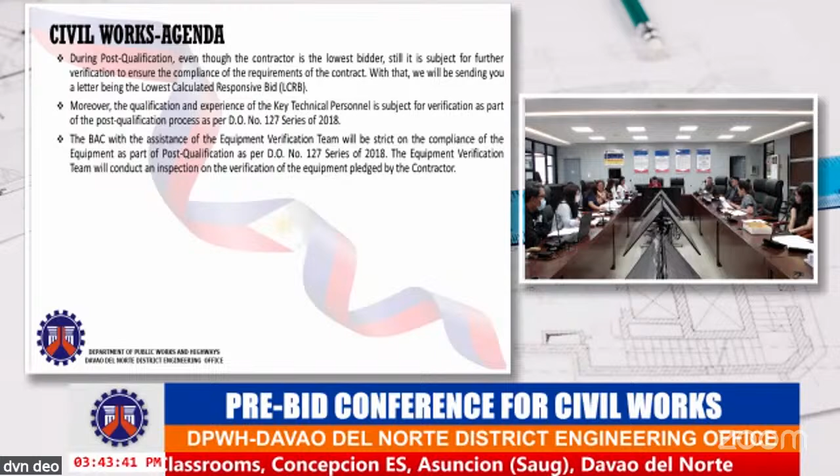The BAC, with the assistance of the equipment verification team, will be strict on the compliance of the equipment as part of post-qualification, as per DO number 127, Series of 2018. The equipment verification team will conduct an inspection to verify the equipment pledged by the contractor.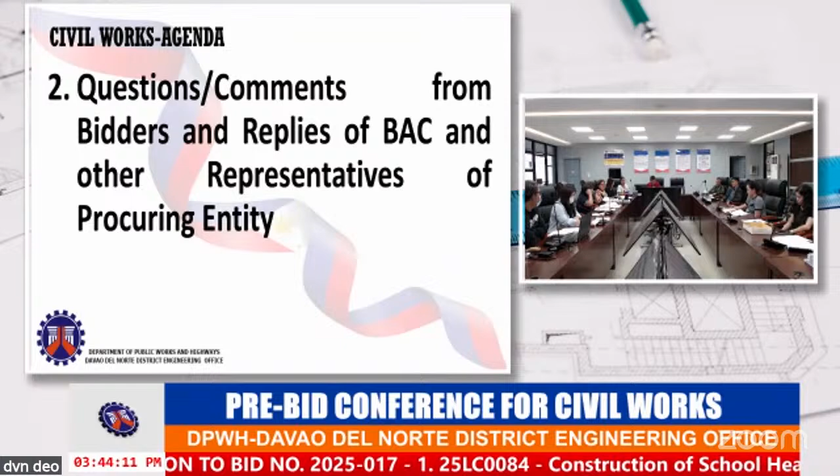On the questions, comments from prospective bidders, and replies from BAC, do you have any comments from our viewers? Good afternoon, everyone. Good afternoon, Mr. Chair. There are 82 views, 6 concurrent viewers, and there is no comment, Mr. Chair. Thank you.

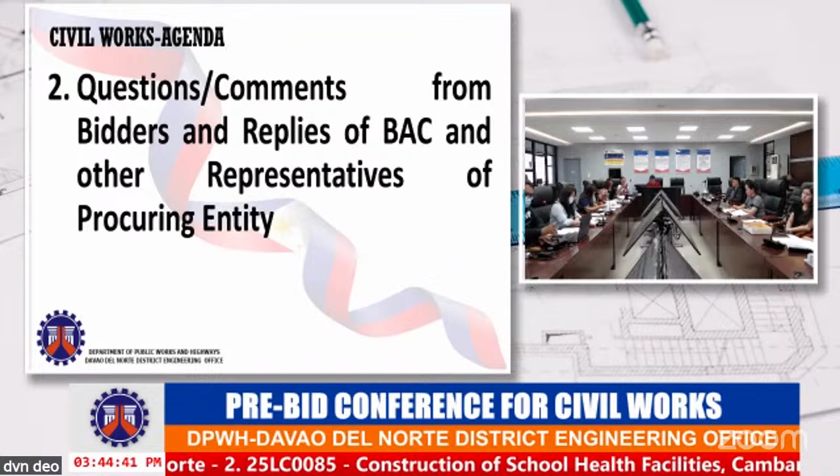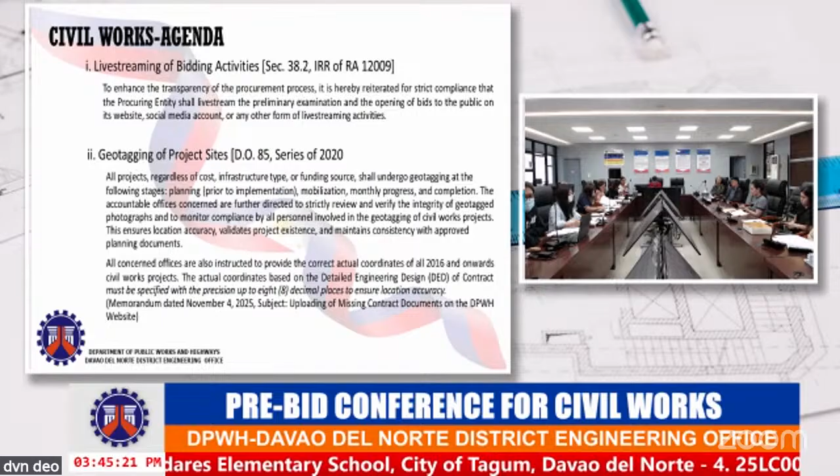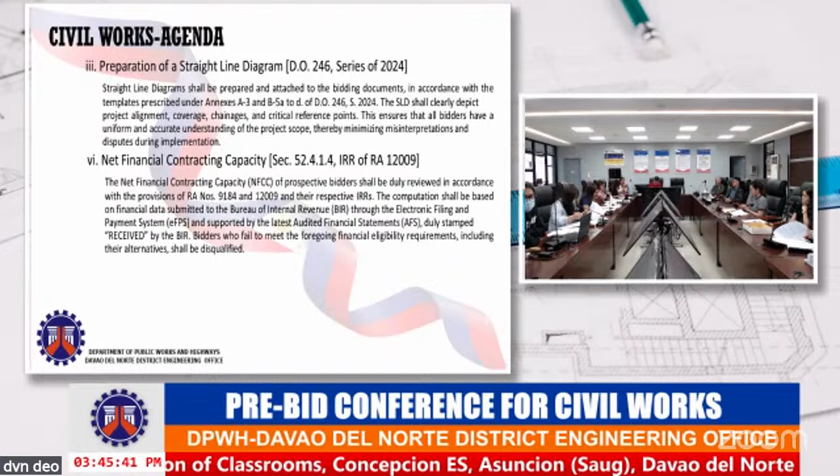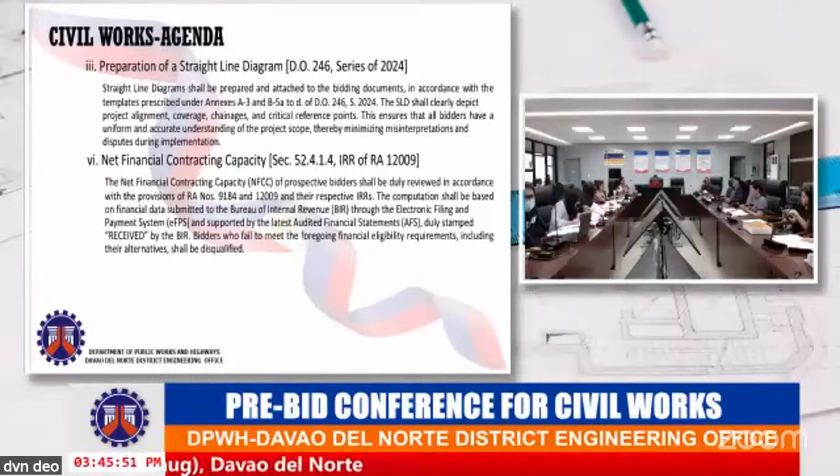Okay, next on other matters. For the other matters, Mr. Chair, we have to reiterate the interim guidelines upon lifting of suspension on procurement activities for locally funded civil works projects as referred in the DPWH memorandum dated September 16, 2025. These are the following: live streaming of bidding activities, see section 38.2 of the IRR of RA 12009; geotagging of project sites as per DO 85 series of 2020; preparation of a straight line diagram as per DO 246 series of 2024; net financial contracting capacity, see section 52.4.1.4 of the IRR of RA 12009; and lastly, disclosure of relations and beneficial ownership, see section 81.1 and section 82 of the IRR of RA 12009.

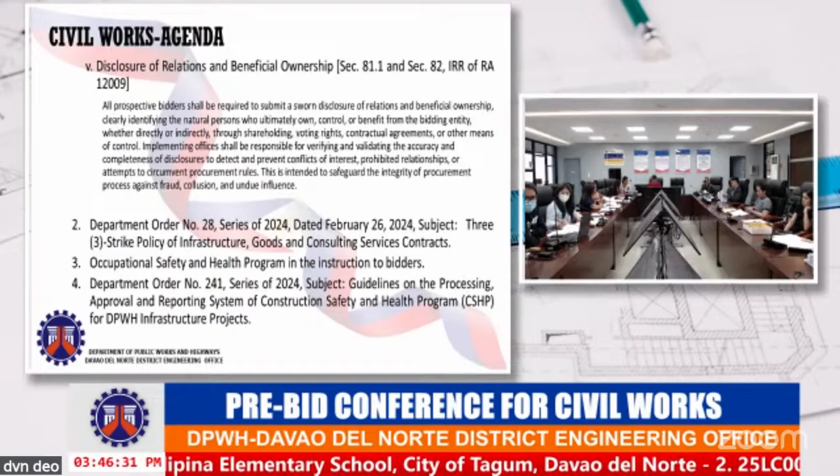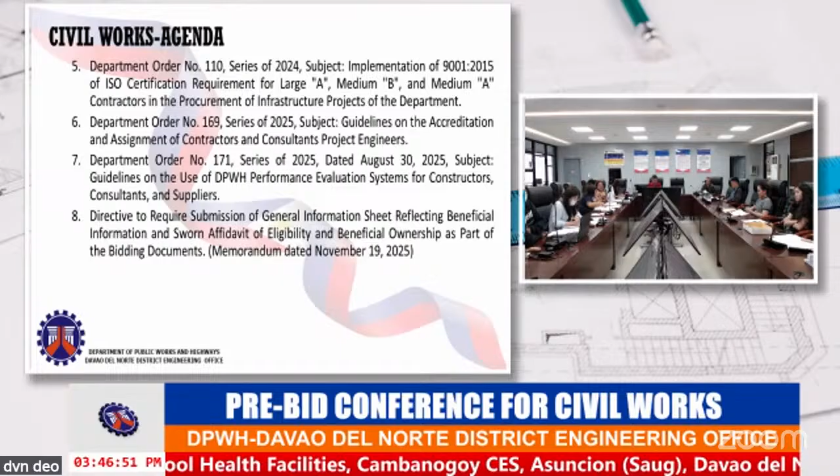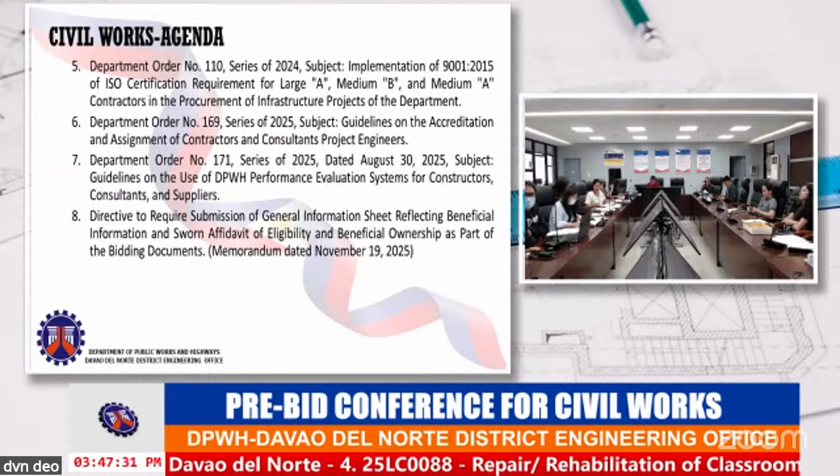And for the prospective bidders, please take note of the department orders: Department Order Number 28, Series of 2024, dated February 26, 2024, subject three-strike policy of infrastructure, goods, and consulting services contracts. Also Department Order Number 241, Series of 2024, subject Guidelines on the Processing, Approval, and Reporting System of Construction Safety and Health Program for DPWH infrastructure projects, and the Occupational Safety and Health Program in the instruction to bidders. We also have Department Order Number 110, Series of 2024, subject Implementation of 9001-2015 ISO certification requirement for large A, medium B, and medium A contractors in the procurement of infrastructure projects of the department. And we have also Department Order Number 169, Series of 2025, subject Guidelines on the Accreditation and Assignment of Contractors and Consultants Project Engineers. Lastly, Department Order Number 171, Series of 2025, dated August 30, 2025, subject Guidelines on the Use of DPWH Performance Evaluation Systems for Constructors, Consultants, and Suppliers.

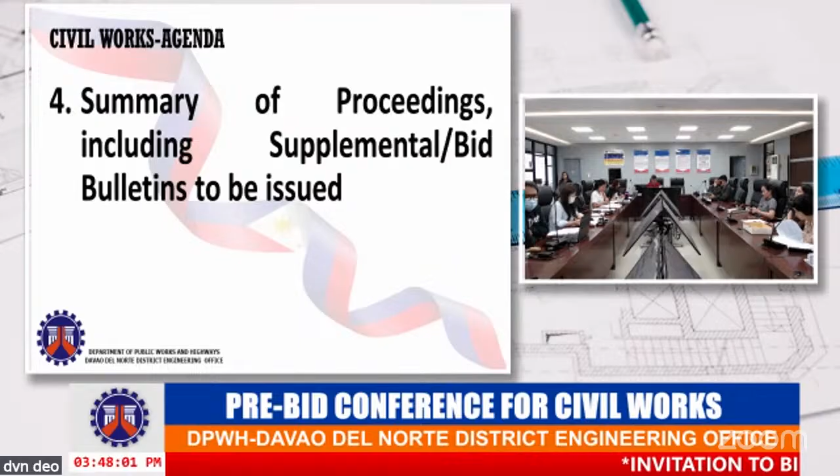We also have the directive to require submission of General Information Sheet reflecting beneficial information and sworn affidavit of eligibility and beneficial ownership as part of the bidding documents, per memorandum dated November 19, 2025. And Mr. Chair, we have to remind our prospective bidders that their bid documents must follow the completeness and sufficiency of the bid. The discounts offered should be clearly and legibly written with signatures so that the BAC will be able to read it during the opening of bids.

If there are any changes in the basic contract data of these projects, kindly closely check and monitor the DPWH and PhilGEPS websites for information and guidance regarding bid bulletins, amendments to the bidding documents of these projects, and all other notices such as postponement or re-advertisement. Our bid opening schedule will be on December 16, 2025 at 10 a.m. That's all.

Thank you for that information. Okay, based on our agenda item, that's all for this procurement activity. BAC members, is there any information, query, or discussion? The chair hears none. Any motion for the adjournment of this proceeding? Okay, Lana?

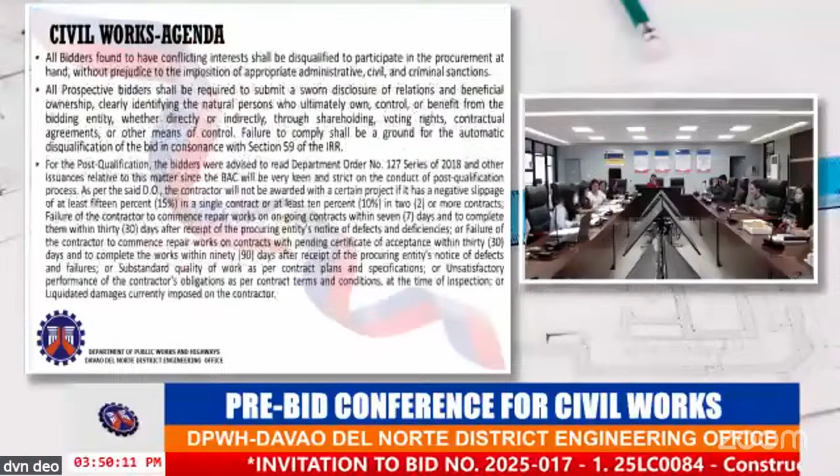Thank you for that information. The planning engineers, please be guided by that information. Okay, so that's all for this pre-bid conference. Any motion for the adjournment of this proceeding?